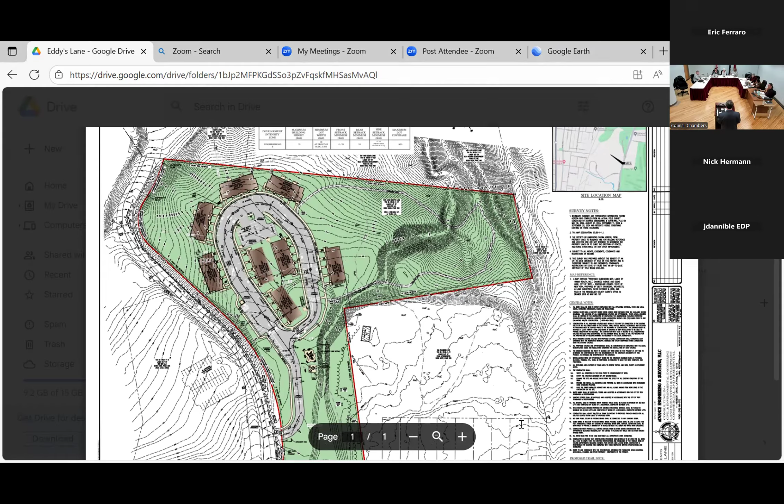There's nothing within those comments that we received from the staff report that are major. They're pretty much minor. I've spoken with the applicant. He will allocate some space in each building for the bike racks or the bike storage. He's not going to be seeking a waiver for that.

That will be allocated in 3 of the buildings they're being built. The other items as shown in the staff report are just minor items. As I mentioned, we'll be able to easily address those with some signage for the trails and a kiosk for the trail.

So you have a monument sign. Yes. Did you get a variance for that? No, we haven't. So we have to take that into consideration. Yes, that's going to, yes. And they don't need to come back for that to us, do they, later? I'm sorry, I missed - so what is it they need? They need a variance for a monument sign.

So, but they wouldn't have to come back? If they get the variance, that's all within. If you want to approve the application, have you had a public hearing and stuff like that? This is a public hearing. You can condition the approval. Okay.

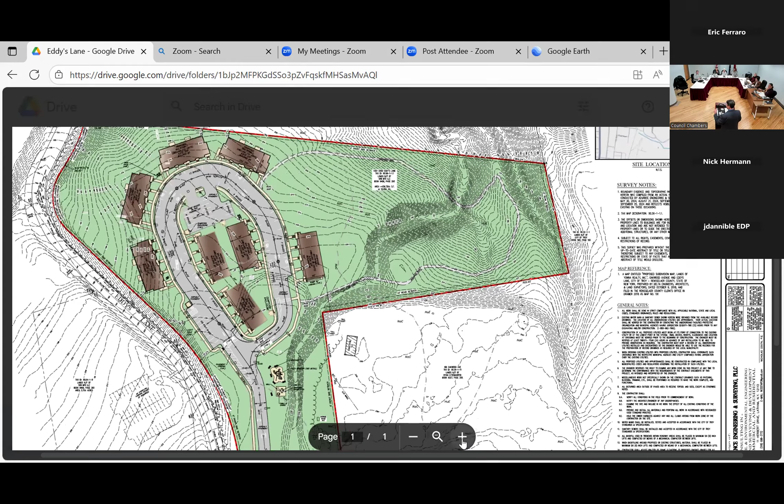We added the playground area, and some signage was added to the trail. That's all that really changes. We did some layout revisions to the parking area to have sufficient maneuvering area for when the dumpster gets picked up.

We also checked the setback to the parking. That was another comment that was brought up, and we meet that requirement, and it's been noted on the drawings. So if there are any questions, I'd be more than happy to answer those.

I have some questions. Sure. You have on your map, one of them that I looked at, I've looked at so many, snow storage areas. Yes. Okay.

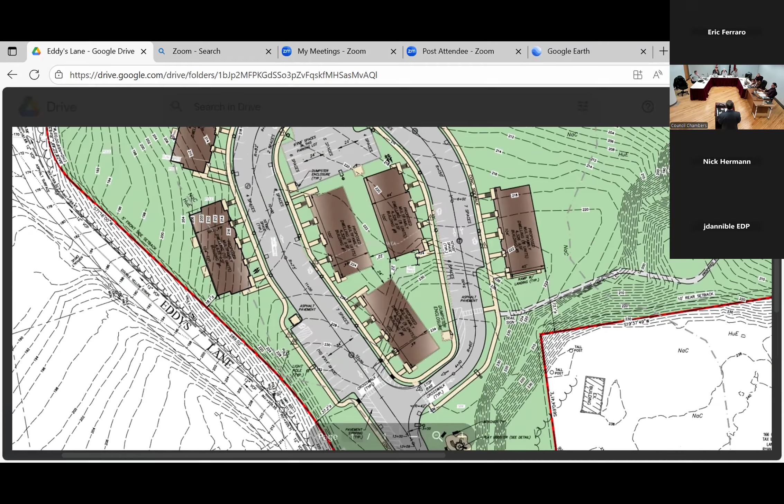How do you move that snow to those snow storage areas? Are you having sidewalks and curbs, and they're beyond the sidewalk? So how do you move that snow over there? They would push the snow over and clear the sidewalks so that the snow storage would not spill over onto the sidewalks.

Okay, so when you plow the streets, where does all that snow go? It would depend, that doesn't show the snow storage areas, but wherever the green space used for snow storage would be accessed, the plows would push it onto there. It's like a mountable curb, maybe. Yeah, appropriate, in those areas, yes.

Okay, the area between building 5 and 4, that great big green space, is that there because of storm drainage? Yes, that's correct. So there's no way that you could move your amenities into that area because it has to be used for the drainage, and that's also the lower area, so it lends itself to operate as a stormwater management area. Okay.

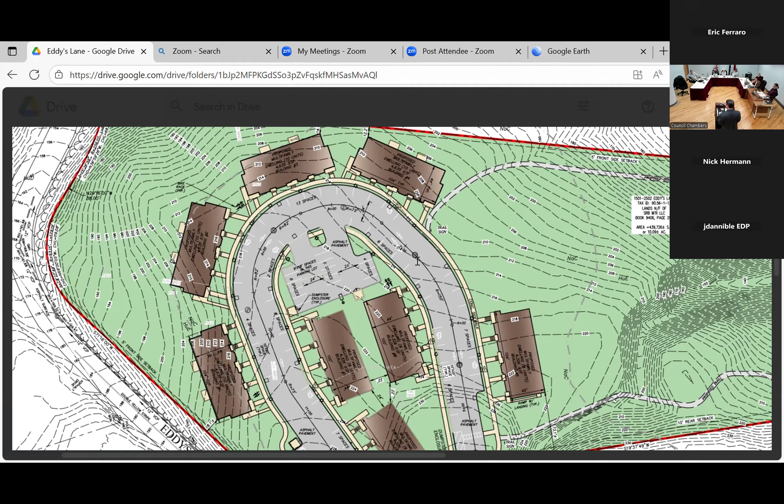Okay, so your amenities, that's all gonna be out in the open? What are you gonna do with the amenities? You're gonna have a little small park for the children. That's correct. There's also some tables and a barbecue area right adjacent to that.

Okay, is there gonna be any coverage for that? We don't show that, but we can certainly consider that. Would you consider fencing that area in for the children? Yeah, I don't see why they can't be fenced, even maybe a low fence, just for that whole amenity area, so if you're cooking, your kids are running around and they take off on you.

Right. Whatever, that would be nice, I think. Okay.

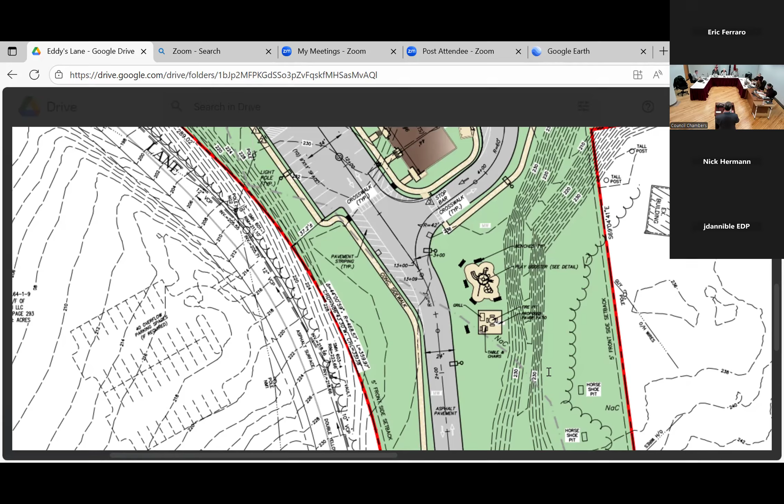Okay, is there anyone here that would like to comment on this project? Anybody on Zoom? No. Okay, so is everybody good with this?

I'm good approving with this application. I'd like to make a motion to approve this application contingent or coincidental to getting a variance for your monument sign.

I second that motion. Do you want to include the fence in your condition? Yes. Do you want any definitions for it? Do you think timber rail is the best option? Do you want to leave it to my discretion and review? I'll leave it to your discretion. Lucky.

So why don't you start from the top if you wouldn't mind? From the top of the motion, would you make the motion again if you include both conditions? I'd like to make a motion to approve this application with a condition of, or coincident to, the variance for the monument sign and suitable fencing regarding any common area use for parks or recreation for the children.

To be approved by the city engineer? To be approved by the city engineer, yes. Good job, Chris. I second the motion. All in favor? Aye. Opposed? Motion is carried, thank you. Congratulations. Thank you.

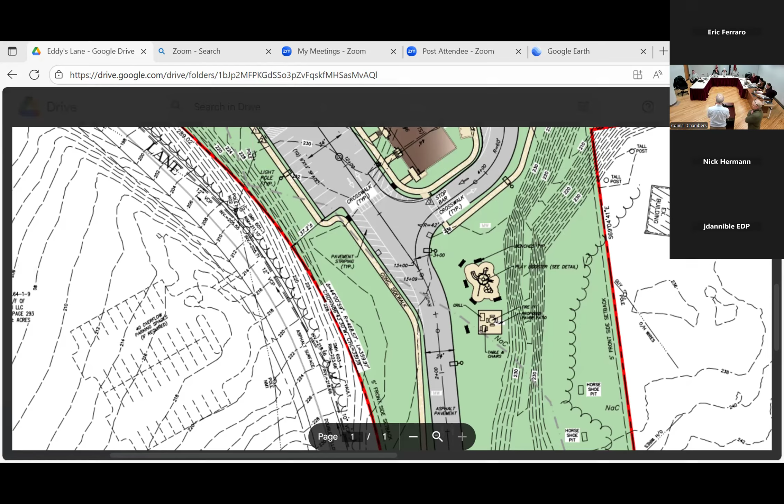Okay, we're looking for our final approval for planning for the project. We have gone through the zoning. We had two variances granted to us, one for the heights of the decks, and one for the slightly larger than allowed sign. We've completed the historic review. I know the staff report says we're in the process, but it was fully granted. We met the conditions of the first meeting and met with them the second time.

Okay. We have submitted to the city the utilities calculations for the additional sewage flows.

We will add, although we have the drawing to show how we do that, the long-term bike parking that's been suggested is something we had missed. There is short-term bike parking immediately across the street from the back. We weren't planning to do additional bike parking in that location. So where would your long-term parking for the bikes be?

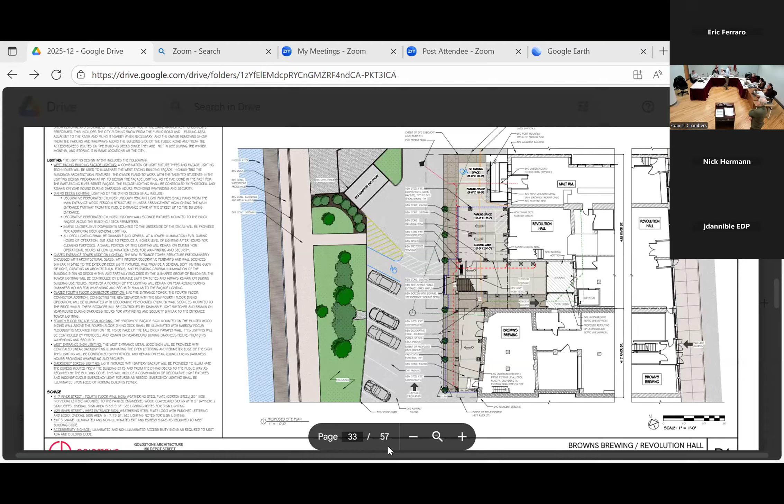We're showing room adequate for 8 bikes. I believe 6 is what's required by the zoning ordinance.

Happy to run down the summary of the project again if you like, but I know we described it before and you've seen the drawings. So maybe for the benefit of the public, if you could just do a quick summary. We're actually asking for your approval of a 4-phase project.

First phase would be replacing some of the decks behind, or all of the decks on the river side of the building, and adding new decks, a new lower level deck. I can point to it here for you. Can you take the microphone with you? I'm sorry. Replacing the deck that's here now, adding a new deck where I'm pointing here, and a second floor deck here. That would be the first phase of the project.

On the second phase, we'd be adding the tower that allows for an elevator to be used to access the upper levels of the building, of the restaurant part and the Rev Hall part of the building. That elevator would also access the upper floors of the building.

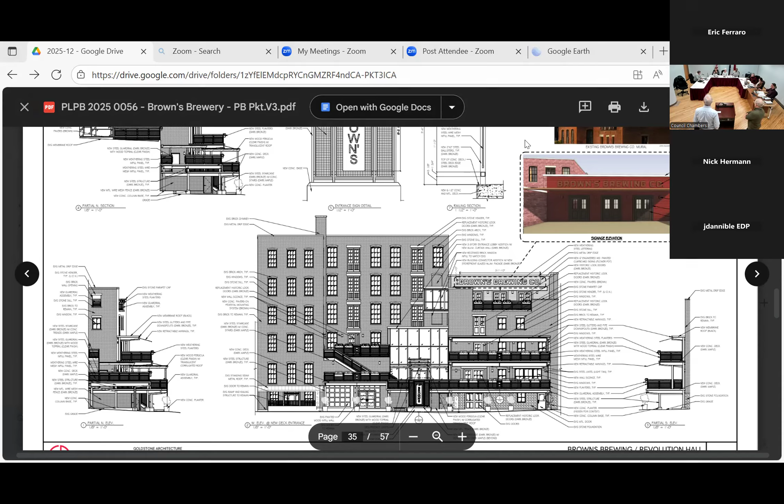I'd like to make a motion to approve this application with the condition of the meeting of the CSO on each phase of the project, with that condition.

I second that motion. Everybody in favor? Aye. Anybody in opposition? No. Well, congratulations, you're all set. Thank you very much. Appreciate all your help.

The next item on the agenda is PLPB 2023-0045 at 185 Earl Street.

Good evening, Greg O'Connor with Architecture Plus, and Kristen Keneg, Director of Real Estate, Unity House. Since our last planning board, we went to the Zoning Board of Appeals to get the variance for the 50% transparency on the ground floor. They granted us that variance, and it looks much better, so we are seeking final approval.

I know we're still working through finalizing our easement on that end, but other than that, there's just the staff comment on commercial signage details. I received your email, and before I had a chance to respond, I was going to direct you to this gentleman here, who is our corporation counsel, so you can follow up with him on what's needed.

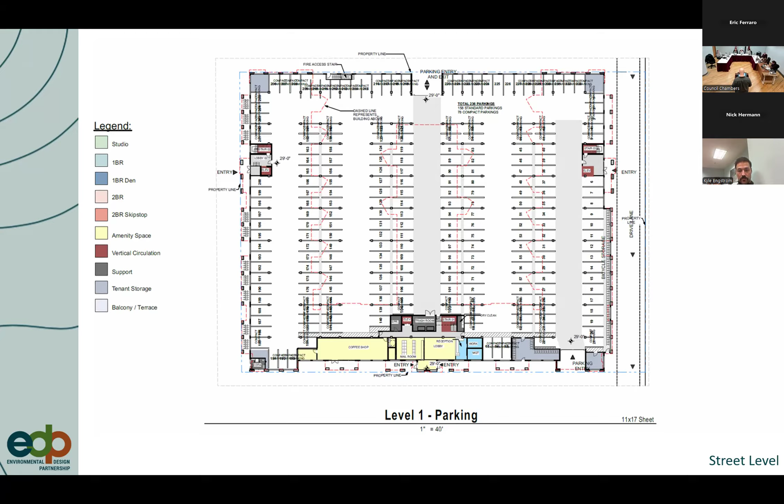Bike storage. We are providing nearly 80 long-term bike storage spaces and almost 50 short-term bike storage spaces. Phase one, we would provide the long-term bike storage in the room.

We have made some modifications to that area where we now have 4 feet of space between the hanging bikes and the front of the garage spaces. We're going to install plastic bollards so that the cars can't go into that area, and it's going to provide ample room to protect the pedestrians and the cars that would be utilizing that space.

We also are providing short-term bike parking storage along the arcade on Fulton Street, and I'll get more into that as we talk about the activation of Fulton Street in that area.

There was a comment in the staff review letter that these bike storage spaces might not meet the requirements for secure bike parking. That's something that we disagree with. The parking garage is controlled with gates and access, passcode access or key fob access, so the only people able to get into the parking garage are the residents of the building. Nobody else will be able to get in, and therefore we believe it's secure. Similarly, if you had a bike room with key fob access, every resident of the building would have a key fob that could get into that bike storage area. So we feel that it is a secure area.

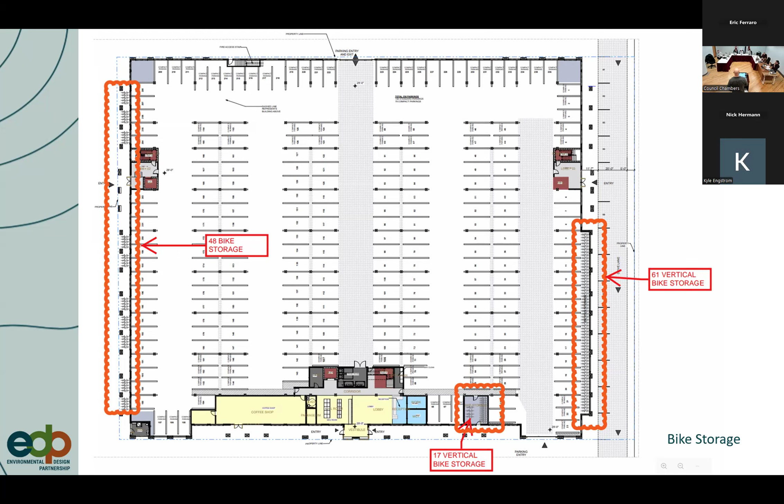Build out of the frontage along 4th Street. This is our primary commercial area, primary amenity space, interior amenity space for the building. You come off of 4th Street for the residential portion, into a lobby, with the mail room to the left, a reception area on the right, a small workstation on the right as well, and then you enter into the elevators and hallways.

We're also building up about a third of that frontage with what would be a potential coffee shop, something of that nature, a small commercial service, where we also have outdoor seating available, glass, street activation, the commercial space that the city's looking for along that frontage.

At the intersection of 4th and Fulton, we have the CDTA bus stop. And as you can see on the north side, slightly different from the last rendering, this is the updated version.

We have the larger bike storage area. This is also going to be like a bike mechanic shop area for people to wash their bikes, hang their bikes, along with spaces along the side of the wall to provide additional bike storage.

Entrance, as you can see, we pushed the entrance to the garage, to the gated access, recessed it into the street to give everyone the ability to pull up, get off the sidewalk, and allow pedestrians to continue walking north and south on that street.

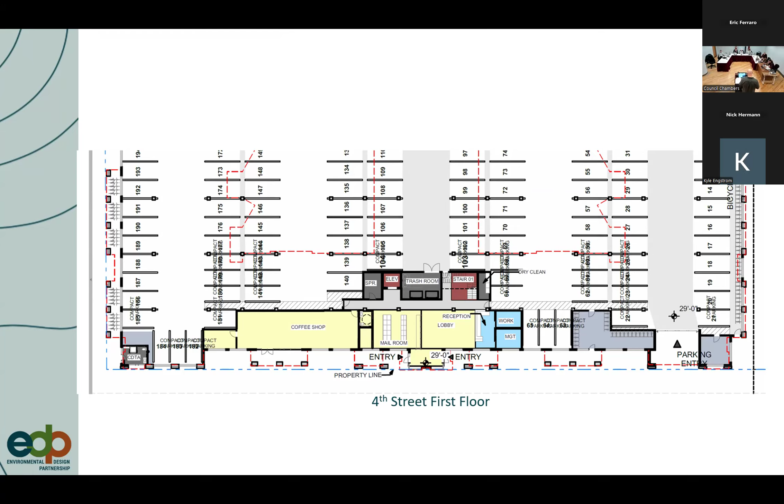The second floor amenity space. There were comments that there's not a lot of detail on the second floor, and that is true. At this point, there is not a lot of detail. We talked about this last time. We want to make sure what goes up there is what the residents are going to want to use.

Looking at the rendering, it is the intent to have pickleball courts or hard surface sports courts of some form, pergolas, walking trails, outdoor sitting areas, outdoor kitchens. We like the idea of having a small area for a gas fire pit where people can sit in Adirondack chairs and have a gas fire pit to turn on. So all things like that will be placed out in that area.

The exact design will be evolving as we continue through the building process after approval. But again, it's an outdoor amenity space with plantings, low plantings, small shrubs, grasses. We're not going to be able to get full-size trees up on that area because of the shallow soils and the green roof that will be existing there.

But there is about 30,000 square feet of amenity space on that area that's also used as a green roof and qualifying as the pervious area for the site.

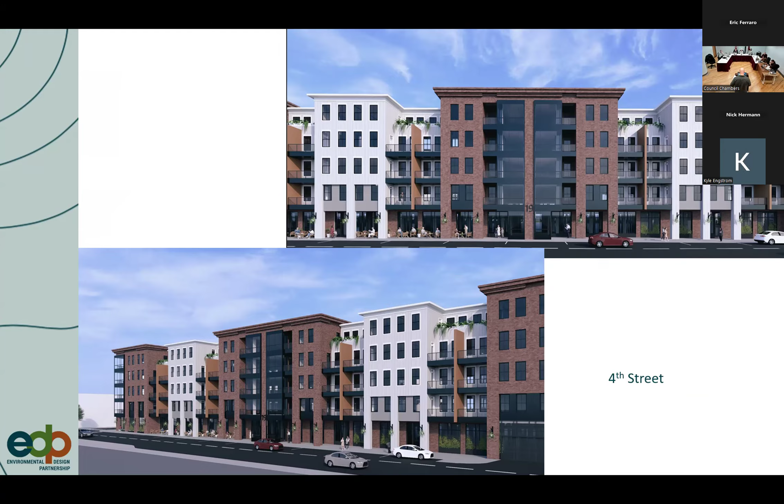This is an area where we started focusing. The city has had some focus on the activation of this street, knowing that the atrium's redeveloping. There are some nice restaurants coming in over there. Certainly we want to make sure that what we are doing is attractive and blends in with that area.

Again, what we are showing is the arcade appearance where a portion of the sidewalk is covered. That area will have down lighting in the roof, so that area will be lit up at night. We are also providing landscaping. There are street trees along that side of the street, although not shown in the rendering. We're providing wall sconces for lighting. There are areas for hanging baskets, if you will, arms extended out.

Just to confirm, we had talked about the initial plan going over the sidewalk, correct? And then we said no, we're going back to the edge of the sidewalk. So the colonnade is not on city property, correct? Correct, none of this is on city property, but the sidewalks are still under the building in that area. There is still a colonnade or an arcade as we're referring to it, but it's not going over city property. We're not encroaching into the city. Okay, thank you. Now also identified along the Fulton Street frontage, and this is alluded to in the code, that in the future, should the demand be there for commercial spaces, this area could be converted.

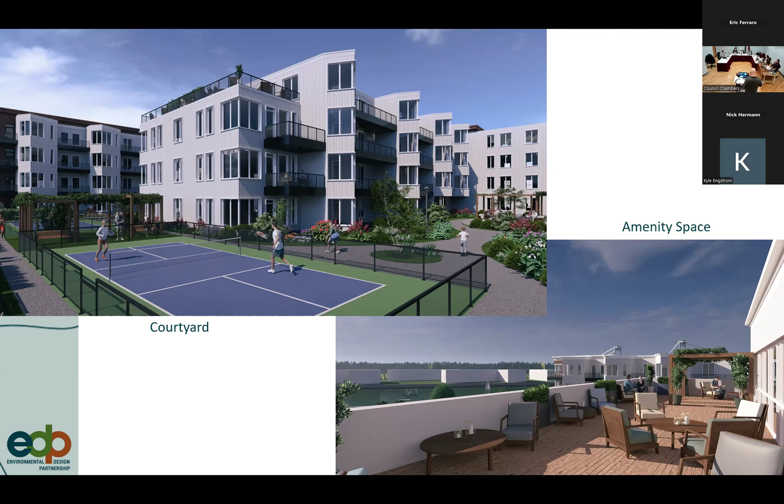So this will be - Museum Place is a two-way street? No, it's a one-way street, a one-way alley - it's basically a parking lot, I don't even want to call it a street or an alley. So you're going from 3rd to 4th. You can't take a left-hand turn from 4th onto it then? Which direction are you going - west to east? From 3rd to 4th. Right, okay. I thought it was 4th to 3rd. No, it's 3rd to 4th, so it's unlikely that somebody would make a left there. Right, there's no reason to.

It's running the opposite way, so you'll probably need some signage since it's not a city street - you'll have to provide your own one-way sign. Right, it'll be one-way coming off 3rd onto 4th, and this actually becomes the primary circulation around the hotel. Not dissimilar to what exists today, other than that there's 200-some odd new people right there. Definitely more people, so it can be signed. However, when it was a parking garage, how many cars could park in that?

They were just parking cars there. There weren't people, just cars. Nobody drives them.

Actually ended up zero, so.

So back to the EV thing. There's code and complete streets, correct? So are we having a conflict between the city fire department and New York State code? Historically, the fire department does not advocate for EV stations to be in structured parking, inside. That's not embedded in code, that's based on their experience and potentially other case studies. But the problem is New York State Department of State hasn't weighed in on this issue with a resolution. So until it becomes building code, essentially it's still a zoning code requirement. So when you say they haven't weighed in, is that blanket or in this project in particular? Blanket, in your sense, yeah.

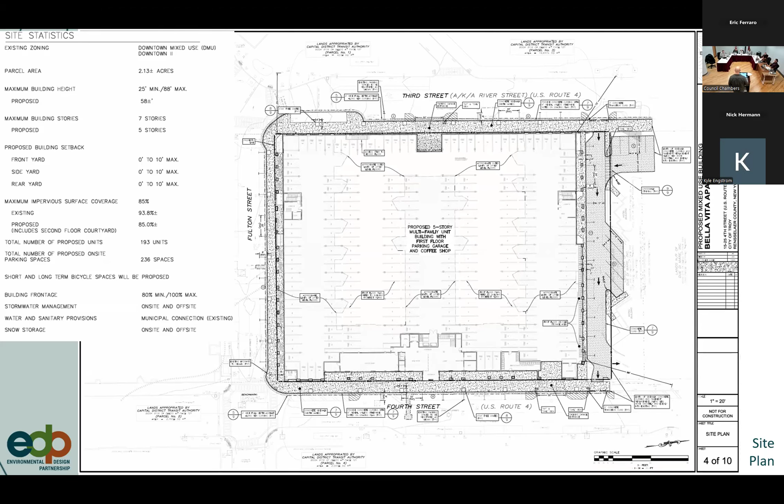Is it an option to include them on the Museum Place spots? Right, so those parking spaces are for the hotel and not for residents of this community, and we don't have 24 spaces over there to accommodate it. We'd also end up having to bring the electrical controls across the sidewalk, and it would impede people walking east-west on that sidewalk. I don't think that's an appropriate spot for them.

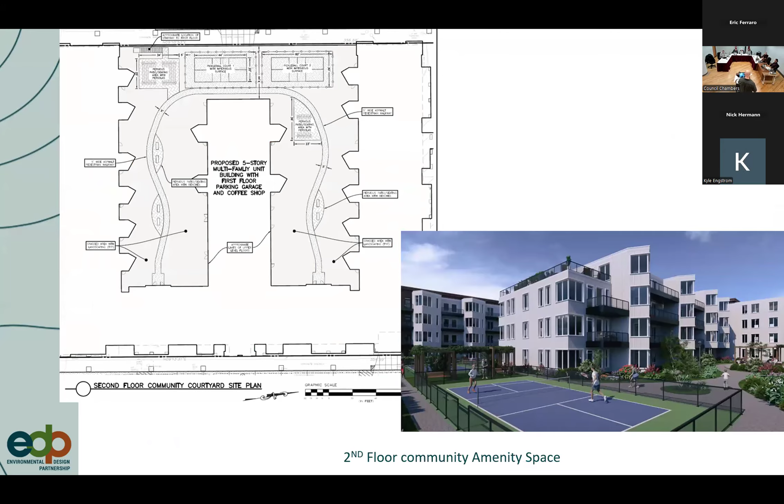So your Museum Place side elevation, do you have that? So we'd be looking here and here. So the first floor existing there is parking as provided. Correct, it's bike storage and parking for two-thirds of this. The problem you're having with the EV is that it's enclosed, it's inside, correct? Correct.

Why don't I get a detail from the fire department on what their concerns are? I can sort of detail those concerns, maybe they could be mitigated with additional ventilation or provision, more something, I don't know. Or, if not, then potentially a referral of approval by the fire department for a variance. We can certainly keep that discussion open. So need more research is what we're saying on that. Sounds like it.

The problem is you can't put the fire out. Can't put the fire out, yeah. Can't necessarily get a fire truck into the garage. You're not gonna bring a fire truck if you have 200 cars that are gas burning, it's going to be a nice fire too.

This is probably going to be a concern going forward as more EVs appear. So don't have an answer. Yeah, I think we will provide them, but I don't want to go against the recommendations of the city. Right, so really it's whatever. Yeah, it's pretty easy to put them inside, everything's right there to do it. I've got one, and it hasn't burned up yet. Give it time.

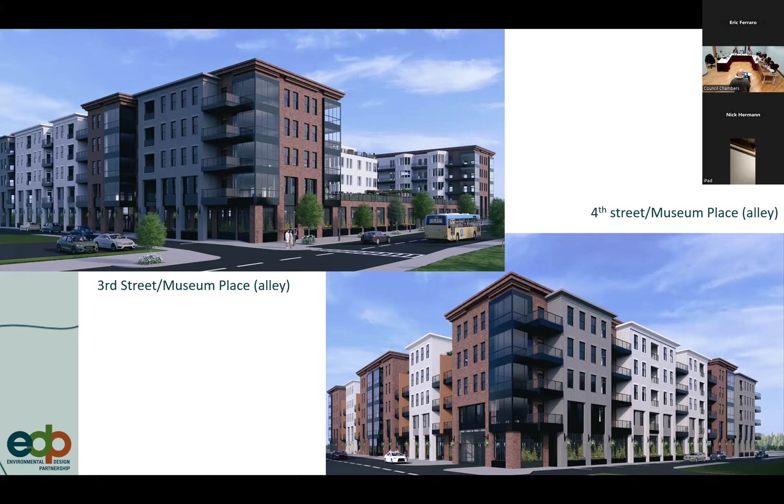Do we still need a lighting plan for this project? Yes. Okay, so we need a light plan. I also saw there was a planter on Third and Fulton. Yeah, I wasn't sure what that was. Let's see here, Third and Fulton. I almost wonder if it was a reflection of existing conditions. Yeah, I think there's an existing planter there that did not get demoed.

I don't know, I guess, oh, this area here, yeah, on the east side, this here. Nope, that's the utility strip, just to the left of that, at least. I don't know if this is an updated site plan, but the site plan that the staff received had a planter there. Yeah, that could be it. That could be it. I mean, so Drew, you might have identified it as an existing condition on the property corner. Yeah, I think it's here, and here is the only green space other than tree grates on that area. I can show you on my computer if you want.

Same spot you just were near. So is that an old planter in disrepair that's just been sitting there from the parking garage, or what is it? Possibly. Yeah, I think it was an existing condition, to be honest with you.

So he doesn't have to keep that, right? No, I think it's going away. That would be a bad event. Actually, Joe, if you don't mind popping over here really quick, I'm talking about this guy here.

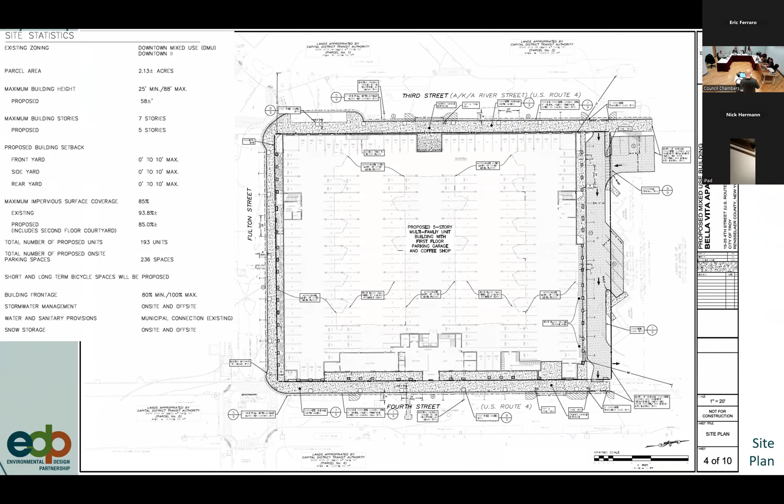I think that is an existing condition note that's just not turned off. What is my existing? If it's not going to be there, then go to the disregard, next sheet in the set or the previous sheet. Sheet number 2 in the drawing set. No, you're not in that. I had to, in order for them to turn, I was able to get the files to work, but I had to upload them individually.

Yeah, I don't believe there is a planter there. It's nothing we proposed. I think there's one there that exists. So we're gonna get rid of it. There was a McDonald's there too. I don't think he's proposing that either, so it might be a mix up on the overlay.

So I guess our ask of the board tonight is we do want to start the coordinated review process and come back in February to go through this and hopefully obtain approval at that point in time.

I believe we have generally a complete application. I think we need to get an updated EAF and an updated complete streets form, a lighting plan, and the survey easement as well. Well, I need a survey with signatures to update your plat to incorporate the lot line adjustment.

That needs to happen before we can go for the coordinated review. You could do it at any given time because it's administratively done, but in order for that parcel that was Museum Place to be incorporated into this project, that's going to require a survey with an updated plat, essentially, that's going to get signed by the director, the executive secretary, and the... Yeah, which we can certainly do.

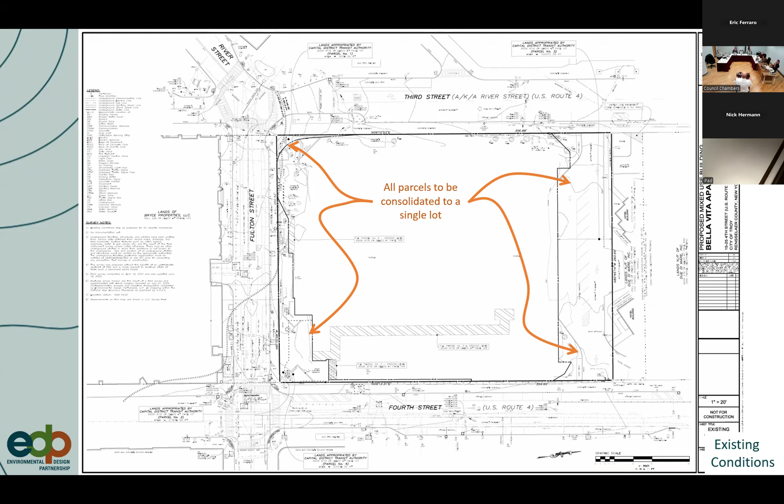As far as EV, we are not big proponents of having EV charging within the structure itself, especially one with such large residential units above it. It creates significant concerns with EV fires within the structure. With other projects we ask that EV charging stations are outside, away from the building. We understand this building does not have outside parking, so we would like to work with the applicant if we needed to obtain a variance to not have EV charging within that structure at all. If that variance doesn't pass, we understand it will have to go inside the structure, but ideally we would like to not have it in the structure.

So the question is about it being residential above the parking, that's the issue, plus access for fire department to get in. It would be an absolute nightmare because it's enclosed, and the standard fire suppression that could be put into the garage won't do it - it won't put them out, because of different techniques being used. It's still a learning process for us. Another thing would be fire separation - they're going to have their appropriate fire separation, but we're talking 24, 36, 48 hours of burn time for these battery units. So it's not viable, and it would be extremely hard for us to put them out.

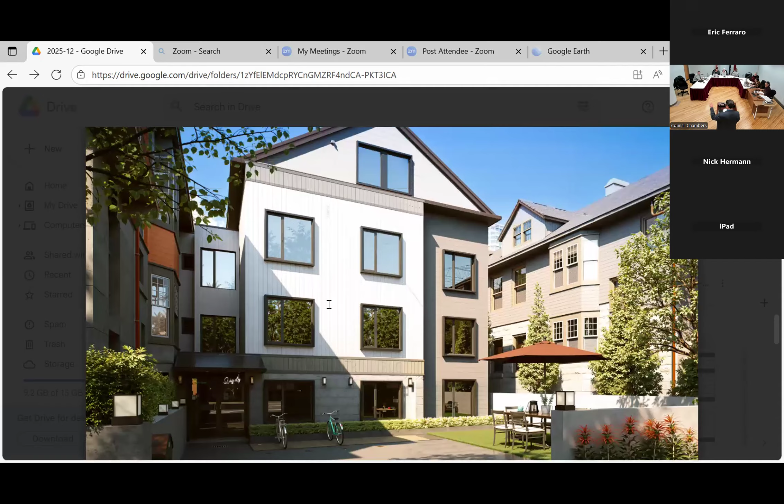Oh, so that's a new elevation there? Yes, that is correct. And the buildings are connected? Yes, they are connected, you can see the connection on that particular plan. They would be connected, not like a bridge, but a full connection.

If that connection were not there, would there be room to roll a dumpster to the back of the building? No, not to the back, to the side, behind where the umbrella is. It's kind of still the front of the building now. Yeah, still in front of it.

So are you going right to the property line here? No, there's space. The site plan shows that there's space between the building and the fence. How much space is that? I don't have the site plan in front of me, but one rendering shows 4 feet to the fence. That's how at least one of these plans is dimensioned. We would have to look to diminish or increase that space, or diminish the size of the building.

There's a landscape wall that's shown that goes right to the property line. That would have to be reduced.

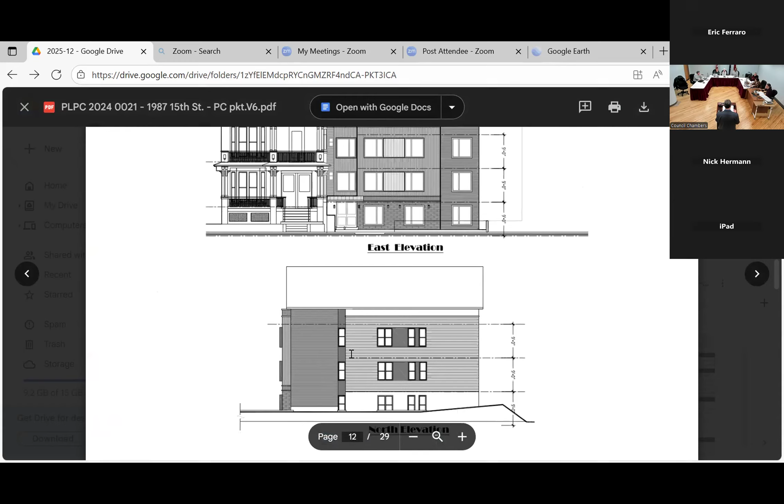It seems like these are shared kitchens, to refresh my memory on this. Yes, that's correct, so they're shared kitchens, like 4 bedrooms to a kitchen? I don't remember the ratio, but there's one kitchen shared for the whole building. So how many kitchens are on the drawings?

What I'm looking at is you've got 29 bedrooms. I'm assuming that could be at least 29 people. Yes, that's correct, so it could be more than 29. Seems like a lot.

If people start, these are college students, correct? Yeah, correct, it's a dormitory, and there'll be a fee paid by the students. Obviously, if you're a college student like I was, you're going to try to minimize your housing expense and your food costs and all of those things. Like, all of a sudden there's 58 people living in a building with 29 bedrooms.

So are these considerations? Yes, that's correct. There's 29 bedrooms, but not necessarily 29 people. Right, it could be more, 58, 60. Depends, I mean if everybody's going to go. And there could be, at any one point in time, upwards of 50 or 60 people sleeping in this building. At least, I can't say.

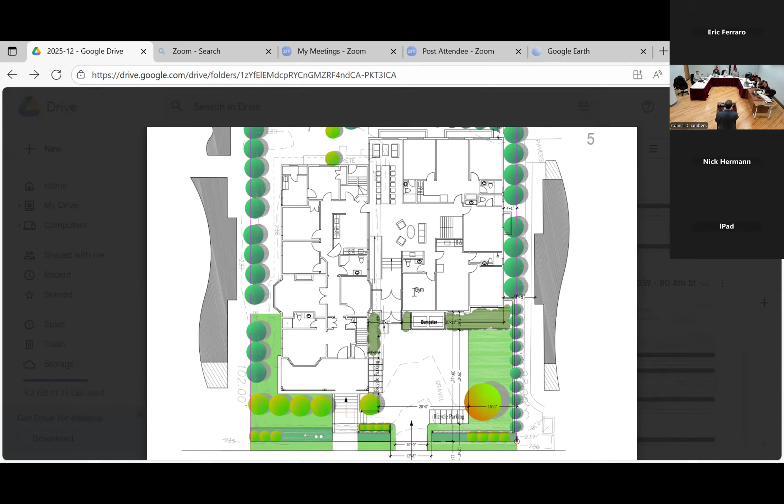How many bathrooms are being provided? Again, I don't have the architectural drawing handy. Eric, do you have the architectural drawing? Yes, which drawing do you need, Nick? Well, they want to know how many bathrooms and how many kitchens. If we show one, one. This is the ground floor plan, it should be in your Google Drive, I'm not sure if you have it in front of you.

It seems like there's a density issue. Although, if you take all the systems we're talking about, bathrooms, dumpster, all of these things are relative to how many people you're going to be servicing in this building. And the staff report mentions that there's a density issue. Have you done anything to address it? No, we just received the staff report.

Is there a rear egress off of the existing building? That's not going out into a porch, it's going outside. I think the only one that we see is the one that goes to the enclosed porch. Eric's got a 4th floor on there too, which they don't really want, and there's no exit off that porch to the exterior. I don't believe so, I don't see any steps or anything. There's no rear exit, it's got to be to the existing building. Yeah.

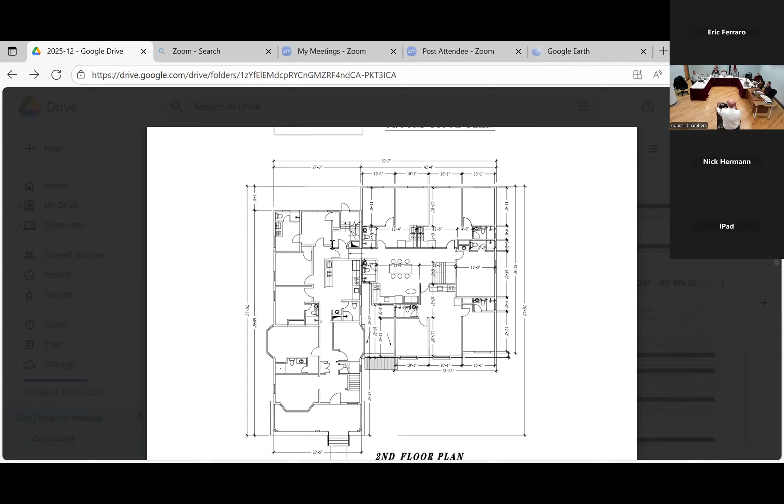And nothing against Mr. Costa. Mr. Costa does great work with plans. I think he's in a rock and a hard place with this. But this project really does not do anything for the city at all. Thank you.

Hello, Lisa Rodriguez again from 1986 15th Street, across the street from this project. I appreciate that they've brought Nick on, a professional, and he just hasn't had a chance to catch up yet with what's been drawn so far and shown to you. I'm sure once he's involved that he'll start addressing some of these comments if it should go forward.

I totally agree with Jared. This, when it got converted, it was a two-family before. When it got converted from a two-family to a dorm, it should have come before you because that's when a major change happened to the property. And so now they're doing this piecemeal project, and that's not how approvals get done. You get to approve things as they change, and this process has not been done properly.

What they're proposing is just way too much for the site, so much so that they have to put retaining walls to make it work, to make bedrooms have windows. And Jared's points are all well taken.

I don't know if this building needs a transformer or not, but if it has an 800 amp service or more, it will need a transformer. And again, where is it? I couldn't again see the plans because they weren't available online. So I have no idea what they're showing you right now, except the glimpses I got here.

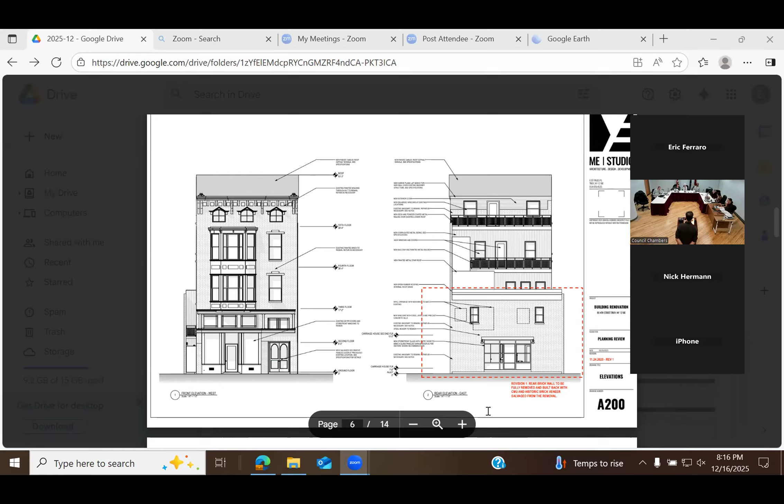Upon further investigation with the masons, it's sort of seen as almost kind of in disrepair. So the proposal would be, the final design would be exactly the same, but the approach would be to essentially salvage the brick and reconstruct it. So Kyle, what you're presenting tonight is that you want to rebuild that wall with new materials that are stable and then veneer the old brick. Yeah, so from the exterior it's going to look like the old thing.

But it's going to be with new construction materials on the inside holding up the wall. Essentially, we would take a currently 12-inch brick wall, remove it, salvage the brick, rebuild it with concrete masonry, and then veneer it with one layer of brick, which would be the historic brick anyway. So the final result would essentially be the same. And again, this was slated for quite a bit of demolition anyway. So that's where we're at.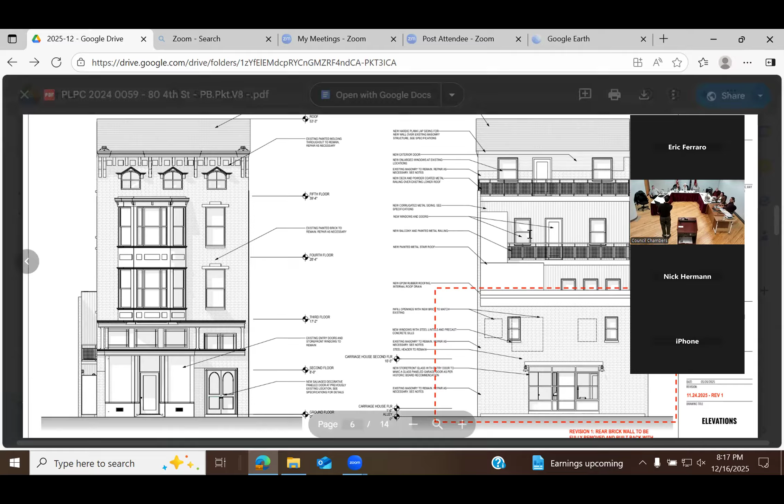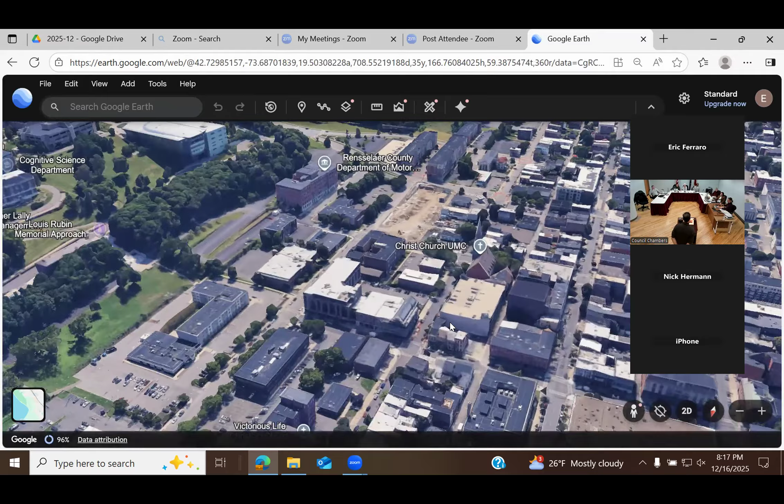Which brick walls are these, the alley ones? Are they going to be demolished? It's the alley wall, yeah, there's two of them, I can show you. One right next to... I know, the red dots, that's why I'm asking. Yeah, currently it looks like this, I could pull it up on Google Earth. So when you rebuild the wall, will you be using the brick that you're taking down and replacing it, or using old brick from someplace else? We're gonna salvage the brick from the site and reuse that, clean it and reuse it. Good, thank you.

Oh wow, this is the good Google Earth here. It's high def, only the best. How much do you have to pay for that? Oh, look at that, wow.

Yeah, there it is. So do you believe that all that brick can be salvaged to put a veneer on? We also have the other wall of this carriage house coming down, which will also give us some brick. So with all the brick coming down, we feel pretty confident that we can get it.

Historic is okay with that. We've brought this to their attention, as long as we're reusing the brick and it's essentially all the same.

So is it just that wall right there? Yes, this is the one change. To be honest, we're still in the process of investigating it, but the masons felt pretty strongly that once we get into the work, it might just be coming down. So that's kind of the brick that's there—it's structural now, but you want to go with a veneer look, structurally sound, using that same exposure basically.

It's possible that when they get into the work, they might find that it's salvageable to just keep the wall up. I'm here today just trying to get ahead of it, to say we might end up needing to go this route. I don't know that we have to.

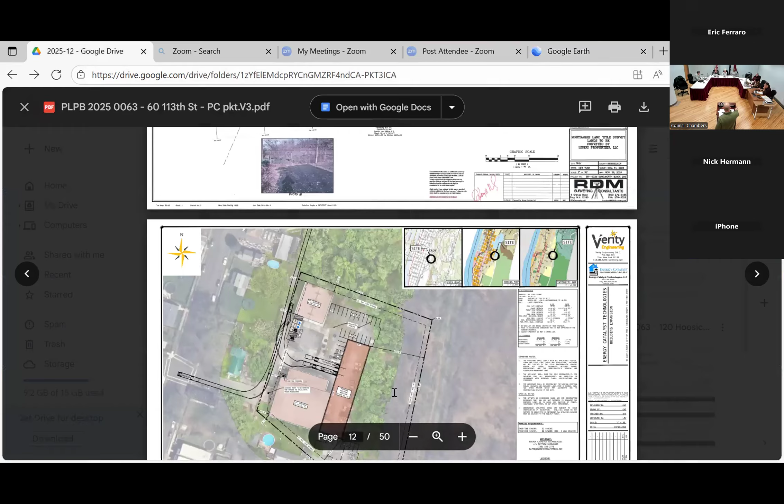The proposal in front of the board this evening is the site plan review and the renewal of the special use permit, along with conversion from time-based to permanent. It includes a 10,000 square foot addition keyed onto the principal structure.

I'll just point here—this again is the 11,000 and change principal structure. This is the principal structure, and this is where the 10,000 square foot addition is proposed.

With that, there's going to be a new loading area proposed. Right now, the way this building was designed, loading is off the terminus of 113th Street, a strange existing condition clearly built under a different zoning code at the time. We know that's generally not a desired place to have loading, where vehicles or trucks parked and trying to maneuver can conflict with street traffic.

So we are going to move loading and unloading to the interior of the site as indicated. As part of this plan, we're relocating parking. This plan is drawn over an image, but the existing parking for the facility is striped right here—it's no longer going to work in this configuration, so those spaces are being relocated to the northeast corner of the site.

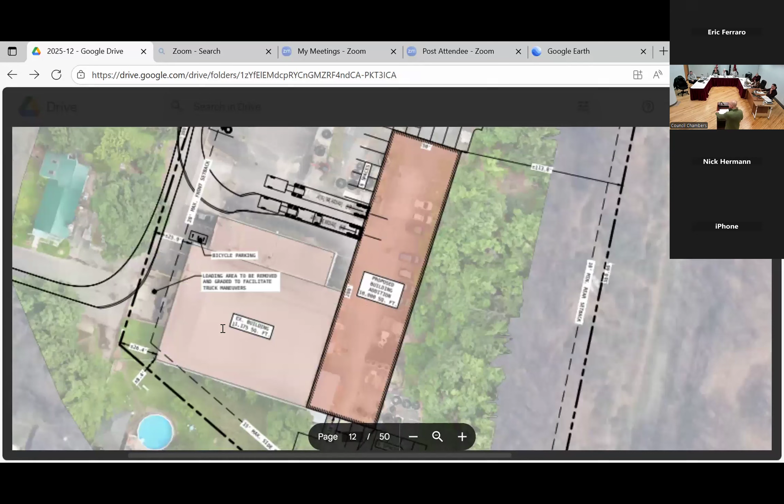With the addition of some other parking areas as well—Eric was just panning at the south of the site there. We can get into what that's going to be, but again it's revised parking, revised loading, and the addition of the 10,000 square foot warehouse. The site will have utility connections, drainage, lighting, and minimal landscaping as well, although not shown. This is generally conceptual for the board as we're discussing the renewal of the special use permit.

Access to the site will remain unchanged but altered slightly. Principal access to the site, addressed at 60 113th Street, will be from 113th. We will keep the 9th Street access open as well.

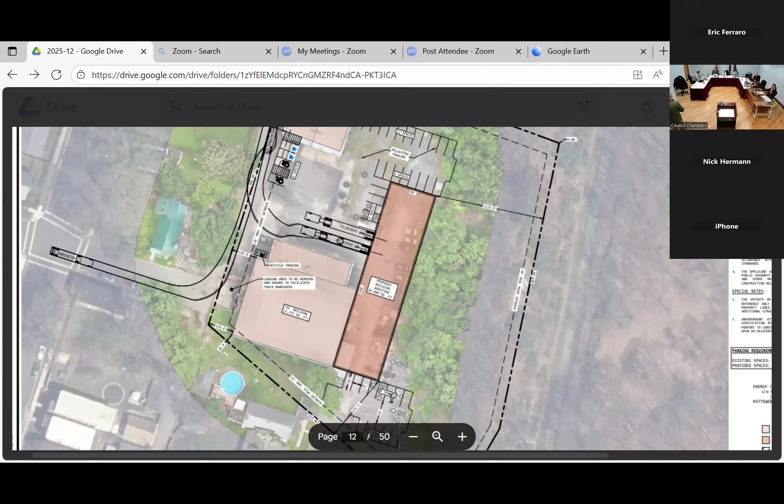I'm going to dovetail this into why we've got the parking arranged the way it is. We're gearing up for the applicant to support up to 50 employees at this facility with this addition. Our traffic demand management plan has a parking demand section indicating we're planning for about 32 parking spaces, and right now we're providing 43 to generally show mass and scope of what can be supported.

So generally speaking, just because our TDMP indicates that 32 spaces will be sufficient, it doesn't mean he might not need more for 50 employees. It's just the starting point.

Now, why I'm coming back to that is because we believe the parking at the north part of the site will suffice the applicant for quite some period of time, until he reaches an employee count that can't be handled with existing parking. We're proposing to grind and restripe the parking in the south and phase it, or bank it, to be used at a later date. When we do that, the 9th Street entrance would be open to employees only, no truck traffic through 9th. We believe that's desirable for the character of the residential homes and setting on 9th Street as well.

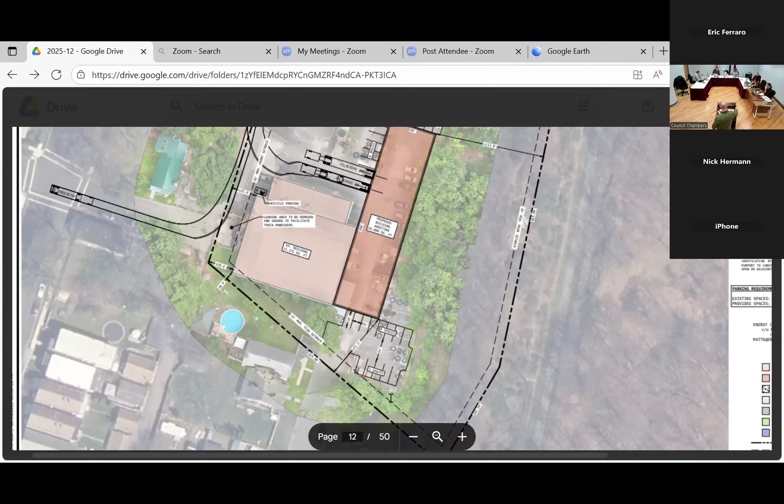The project will need some area variances to move forward. I wanted to point out that our expectation tonight is that this board isn't able to take any action. We're here to introduce the project, get your feedback, and talk about it before the applicant appears at the zoning board to seek additional entitlements. I'll spend a second describing what those are, although it is in the staff memo.

The first is building square footage. In 2023, for this existing facility, when it comes to variances we're talking about gross floor area, not the footprint the building takes up. This is two stories, with about 18,000 total square feet of gross floor area. Back in 2023, in order for the reoccupancy to occur, the applicant received an area variance that memorialized the building existing as it was, since the maximum allowed in the zone is 2,500. So we've got to seek another variance to expand that by another 10,000 square feet. That's one variance.

Another variance is for accessory parking being within 30 feet of a lot line. The other two relate to principal building setbacks. The first is a front yard setback. I wanted to indicate to the board that 25.9 feet and 26 feet is an existing condition. The code right now is 0 to 20, 0 being the minimum, 20 being the maximum, so the existing building does not comply.

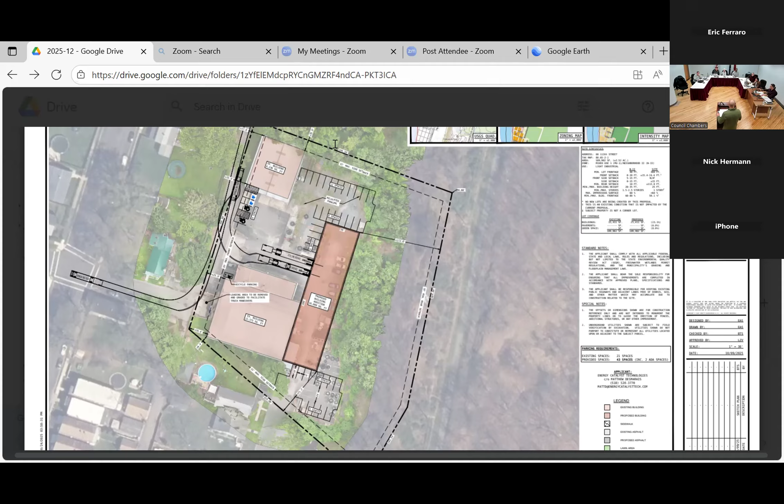Are they utilizing 9th Street right now since it's open as a loop through? Is that pattern changing, or do you think they're already approaching from elsewhere? All of the site photos indicate that gate has been locked and maintained to be locked. Doesn't look like they're making any deliveries or parking through that area.

What would you say the increase in triaxle, large trucks is from current conditions? Great question. We believe there's only going to be 3 to 5 trucks a week. The applicant is indicating that the amount of truck traffic they see today versus this build-out won't change, because they don't fill a truck when it comes, nor do they fill a truck when it goes out. So a lot of it would be just filling up the trucks, getting full truck deliveries. The applicant is not anticipating increased truck deliveries, just the ability to better utilize that cubic volume in every truck coming and going.

So did you say that at 113th Street they have to maneuver to back in all the way to the loading area? I haven't visualized it, but when you're there at the site, there's really no possible way for a truck to find that dock with the cab facing the building and do any type of turning to get to the dock door. There are dock doors right here right now. We're proposing to close those dock doors off and eliminate any loading and unloading occurring at the terminus of the 113th Street right of way. So they can't pull in after you get rid of that docking area in front, they can't just pull in and go to the other loading dock where you're going to put it?

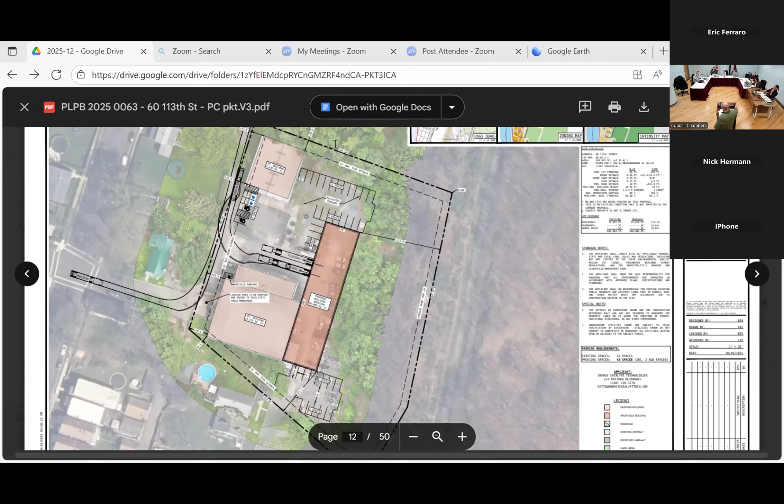So how long do you think that's going to take, to remove the loading dock and put it on the north side? I think the answer would be the completion of construction. The only loading and unloading today is here. The applicant needs to maintain production operations until such time, but I would say when the contractor hands them the keys to turn the building on, this will be closed off and that will be turned on.

So this is the Uncle Sam pipe previously, before we're doing the geothermal. That's correct. Were there more trips then than there will be now? Great, another great question. So the 2024 TDMP by Creighton Manning that was on file for the reoccupancy summarized just that. They took land use code 140, which was manufacturing, and compared based upon the square footage versus employees. Their conclusion at the time was no site improvements needed, a lot less trip generation between the old use and the current use.

That's right. Now, when it was a pipe place, there were also different ways into the property. It was kind of odd, with pipe storage in the back, depending on what type of pipe you wanted, it felt like you could get in different ways. So you're going to control all that to one access point. That's correct. Okay, thank you. You're welcome.

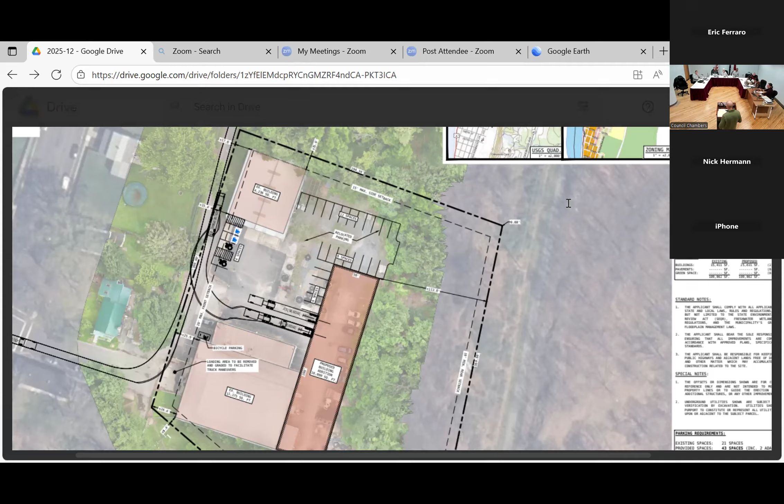There are some retaining walls to deal with grade transitions around those docks. So I think the question is what's happening there, and the answer is we don't have that level of detail today. We'll provide what that is in a grading plan and how that's going to be worked out.

I'll speak to the board and the commenter can listen in. If you can see there's a grade change there, we'll be filling in that area so the trucks have the ability to sweep through that area as well. That grade transition is the biggest impediment to any large swept path of a vehicle, so that will be filled in. I'm assuming you can see from back there, and I believe that may answer the gentleman's question.

Is there fencing all around your property or no? Currently there is, you can kind of see right here. How that's going to work is going to be a little bit different on the final site plan.

I just want to make sure this board understands the concept plan you're looking at is broad brush terms to discuss the massing, the scoping, the access, the traffic, things like the lighting plan, the landscaping, the grading, the fencing - all will come later through further discussion. But I want to communicate that we do intend to have a secure site. Where the fences are going to go, we'll leave last in terms of where they should go.

Brian, is there a fence on the eastern edge of the parcel, preventing anyone from coming in from the bike trail? That's a good question. I'm just going to try to look at the existing condition survey that was provided to see if there was one up there.

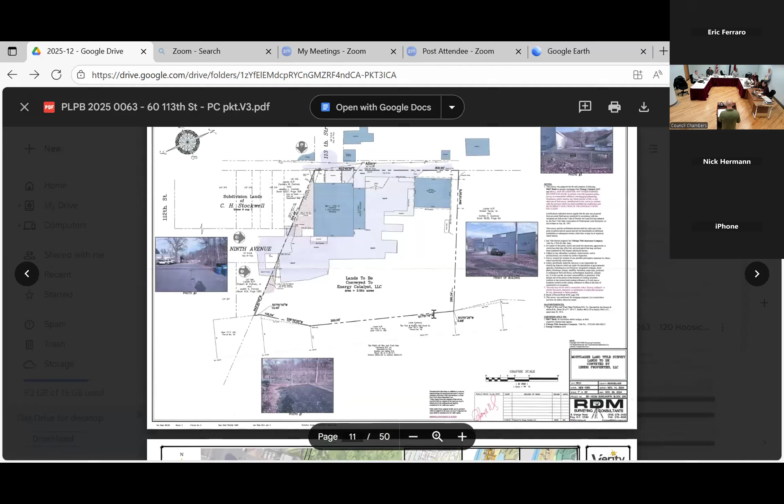It looks like there's a portion of a chain link fence along one of the courses, but it doesn't look like there's one plotted all along the back courses that would border that. I'm not sure if the activity is still ongoing - yeah, I see what you mean.

It's probably ceased to a certain extent, but the police department had issued some concern when this was evaluated for the first round of special use permit review - cars from this parking lot, previous to the current occupancy, were getting their catalytic converters taken out. They made a note of that, and then nuisance reports, so they advised security cameras and perimeter fencing, if it's feasible.

It's another great question, because as this type of use cohabitates with single family all around, Matthew, the owner operator of the company, indicates he generally has good relations with all of his neighbors, and I think he takes active pride in making sure he's a good stablemate to the neighborhood. But I think at a public noticing process, we'd all hear otherwise if that's not the case.

Your hours of operation are planned to be 9 to 5, right? No heavy outdoor welding. No, I don't think anything that's going to be off-gassing, or any of that, no outdoor storage of materials. So part of this is going to allow the applicant to bring assembly inside. That is correct, yep.

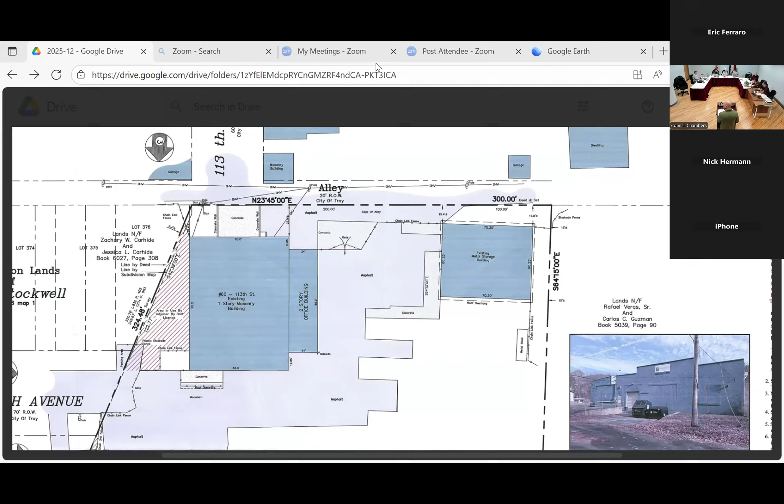So, anybody else in the audience that would like to speak on this? Anybody on Zoom? If there's anybody on Zoom that'd like to speak to this, go ahead, speak. No. Everybody's busy. No? Okay, thank you.

Any other questions from the board? Comments about the proposal before we go attempt to see the Zoning Board of Appeals? So this is unlisted, yeah, I think we have to declare - change the SEQR declaration to unlisted. I'd like to make a motion to declare this an unlisted action under SEQR declaration.

All those in favor? Aye. Opposed? Motion's carried. Now, the other thing is the special use permit extension - we're gonna do that later, not tonight.

Not tonight. So we're good until March with your special use permit and you'll be before us again. We hope to be back at the Jan 20 meeting if we have anything salient. So we don't need to extend you now, tonight. That is correct. Okay, thank you. All set, Chair? Yes.

We are all set, so we'll just have him back in January. Yeah, you understand, so unless they do an application complete or SEQR deck or schedule, you'll have to come back for 2 more meetings at that point - public hearing, complete application. Complete application, schedule the public hearing, then the public hearing.

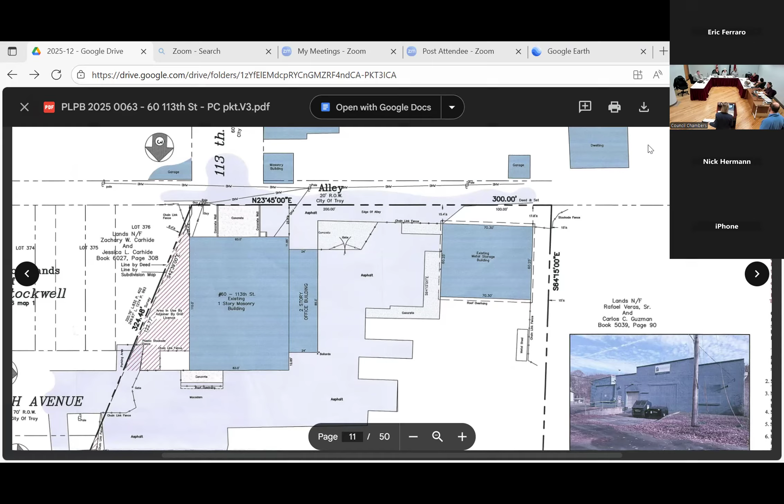Good evening. Good evening. Hi, Eric. I just requested to share on the Zoom. Sorry for that. Should we just stop sharing mine? There you go. Thank you.

Can we have your name, please? Good evening. I'm Karen Majanowski from Bohler Engineering on behalf of James J. Welch and Company, the applicant who is attending on Zoom, and here with Matt Smith from Crunch Fitness, and the property owner is here as well. Let me just pull up our exhibit.

All right, so we're here for a fairly simple project, hopefully this evening at 120 Hoosick Street, which is approximately a 12-acre commercially developed site. Existing conditions shown here at 120 Hoosick Street. We're looking to simply propose a new tenant, which would be a different use than what's there today. So we've added this box on this side of the existing building - that was a retail space. It's about 37,000 square feet, and we're looking to propose a new use and tenant for that, for Crunch Fitness.

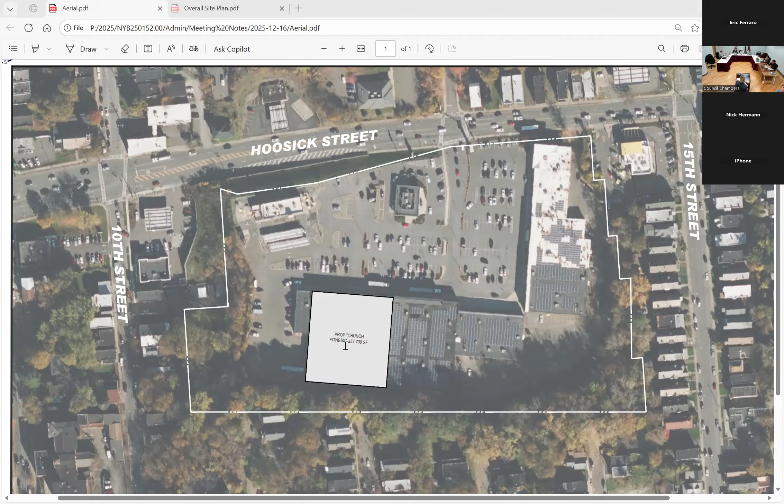I got a bag, I got a bag. I have a motion, you gotta make a motion. Make a motion to get out of here, adjourn. I'll second that. Okay, all those in favor? Aye. Opposed? Okay, we're out of here.